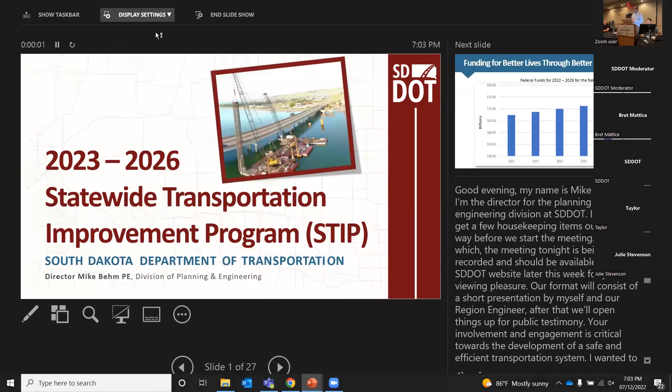Just wanted to talk a little bit about how important transportation is. But really, when you think about transportation and any sort of asset, it requires funding. Our transportation system is really funded through our federal highway program. The federal bill, called the Bipartisan Infrastructure Law, or Infrastructure Investment and Jobs Act, was passed last November. Most of you probably heard about this, a relatively large bill, but for the DOT, on average, about 75% of our construction funds are federal aid. So having a federal bill like the IIJA or BIL isn't really anything new for us. That's how we funded transportation across South Dakota for years and decades.

One good thing about the BIL is we have a 5-year plan or 5-year investment strategy that came through that bill. About $350 billion nationally is going to help improve transportation across our nation. For South Dakota alone, we're going to see around $380 million a year to help improve transportation systems across South Dakota. I mentioned that our federal funds pay for about 75% of the construction projects we have in our state.

The remaining 25% is comprised of fuel tax and excise tax. When you purchase a vehicle, go get it registered. That helps to go back into the coffers to help build and maintain transportation systems in South Dakota. So using those two mechanisms, it helps us to really invest in the future and invest in the transportation system in South Dakota. As we look at that investment strategy, we need to think about what's most important.

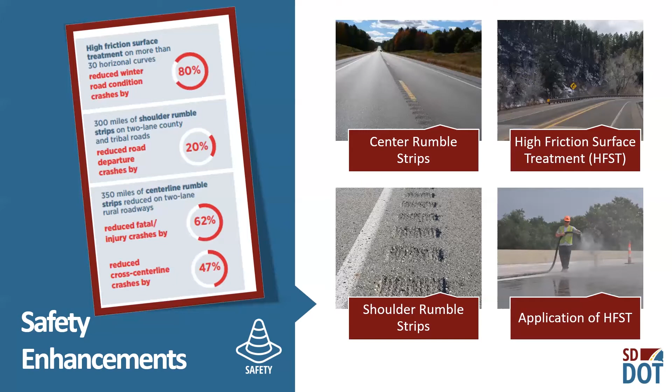Of course, a safe system is great, but it needs to be reliable. I travel a lot throughout South Dakota, like I'm sure many of you do. I spend a lot of time in the car helping to fund the transportation system through that fuel tax.

But as I travel across the state, like many of you, you probably don't measure distance in actual distance, you measure it in time. That's how we measure things at our house. And when we're going somewhere, all right, we need to go to Aberdeen, we need to go to Sioux Falls, Rapid City. How far is it? Oh, it's about 2.5 hours. It's 3 hours, 2 hours and 42 minutes. That's a reliable transportation system.

As we see more traffic throughout our state, especially in our metro areas, we're deploying new innovations like in the upper left-hand corner, which is a diverging diamond interchange. For those of you that have been to 41st Street and I-29 in Sioux Falls, you understand that making that left turn off those ramps can be very difficult at times. This is a new technology that we have. Our first one actually is going into Rapid City LaCrosse Street right now, but it allows that left turn maneuver to happen easier. It's going to help reduce congestion. It's also going to help reduce crashes that are occurring there.

If you don't have the 511 app, that's the one in the middle. I highly suggest you get it. Again, as you think about transportation reliability, it's about expectations and ensuring that you have a good indication how long it's going to take you to get from point A to point B. Our 511 app has been really just a hit. It allows people to plan out their trips, see what the weather conditions are, take a look at the actual video or pictures out there, what the conditions look like at that point in time. It's all intended to provide that reliable transportation system, put the tools in the hands of the users and the customers, again, to ensure that they can get from point A to point B when they need to and plan for that trip.

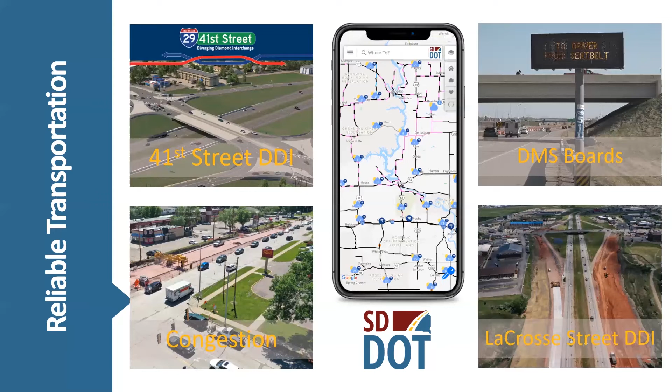Of course, you can have a safe and reliable transportation system, but if you don't have physical assets, it doesn't get you anywhere. So I love this picture. Those are actually all the structures in South Dakota, over 5,700 bridges in South Dakota. And you can actually see the streams and the tributaries that tie into it. It's a really large number of structures that we have in South Dakota, especially considering our population. Population density is low, yet a high number of structures.

We're focusing on different ways to help improve our transportation system, whether it's working with our local governments in the Bridge Improvement Grant Program. There's some great information in the back table there. Also a local federal bridge program, because we understand and we acknowledge that all transportation systems are interconnected. It doesn't do us any good, again, to grow that grain in the back 40 if you can't get it to market. So township roads, the county roads, the state highway system, the interstate are all critically important to ensure that connected transportation system.

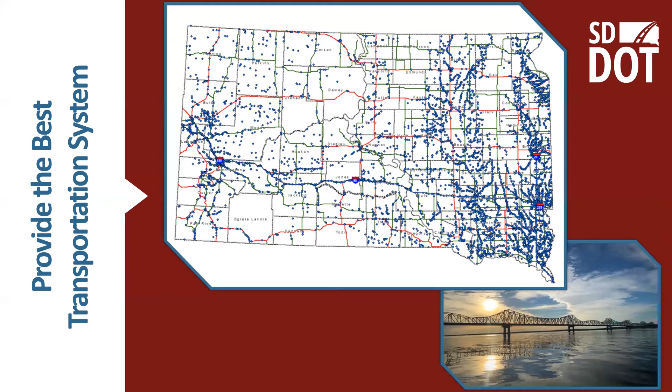So again, working with our local governments, where we have several projects and maybe hit on a few of them here tonight, on our local government's system to help replace some of the structures that are old and in need of repair. Focusing more on the state highway system, this graph just kind of helps give you an indication of what are the ages of our structures.

Through techniques like preservation of our decks and other techniques to preserve the integrity of those structures, we've got some really good life out of our bridges. Generally, you could anticipate 50 to 75 years when those bridges were originally constructed for how long they'd last. It's like any asset. You can do a very good job of maintaining it, but at some point in time being used, it needs to be replaced.

We have a large number of structures in that 40 to 70 year age, which coincides very well with the build of the interstate system, along with the builds of the federal highway bills. So as you can see, we got a lot of work ahead of us, but in the same sense, we're maintaining those state structures in relatively good condition. Over 95% of our bridges are in good to fair condition, which is a great number for us to have.

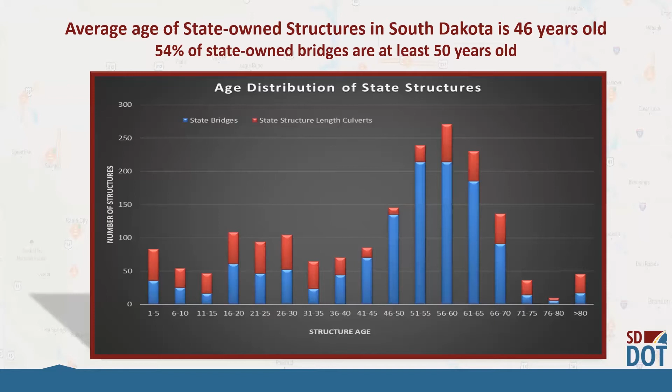We're seeing this wave coming and we're trying to plan for it. So we're going to see a lot of structures coming up in the next few years for replacement across South Dakota. As we look to replace those, we want to make sure they last for generations. So in the upper left-hand corner, you can actually see rock, riprap. Well, we have flood events, and I think 2019 is a pretty darn good example of it. Had a good chance to visit with a friend from Edmunds County here earlier about some flooding issues they have too. So as we look to rebuild structures, now we're shooting for 75 to 100 years on those structures.

So we know that events can and will happen. So what can we do to help prevent that bridge from going out? Instead, maybe the roadway gets washed out. A little section of roadway is a lot cheaper than a bridge. So we're working on things trying to prevent bridges from actually going out and improving the resiliency of our transportation system.

The upper right-hand corner, that's actually one of our drones, our unmanned aerial systems. Those are being used now. Today, they've been deployed for bridge inspections. It makes us really more efficient, provides us better quality data. And at the end of the day, it doesn't put our folks up in harm's way near as often. Been a great opportunity to deploy technology, again, trying to serve our customers, give that best transportation system we possibly can.

Lower right-hand corner, that's actually just steel, right? So as we look at reinforcement that we have in our concrete and actually in our bridge decks, we've made a transition. We're transitioning from epoxy coated, which is just a coated steel, to the stainless steel. And the reason for that, of course, we got 2 seasons. We got construction season, then we have winter, and we see a lot of salts going down. So as the salts go down, what happens with steel? It corrodes, right? We start seeing issues, decks start going.

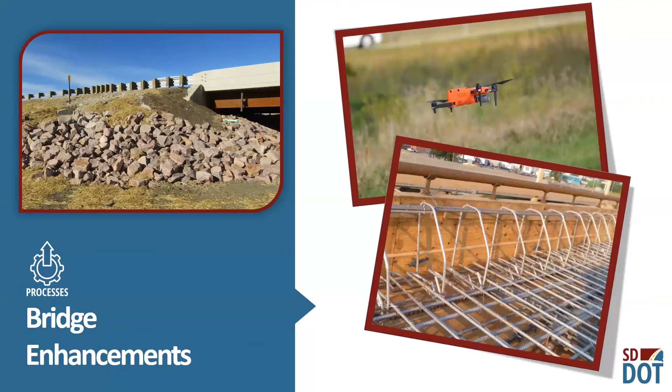So we're deploying a new technology for South Dakota of using stainless steel reinforcement in our bridge decks. We're showing that we should be able to save about 20% life cycle cost in that bridge over time by shifting over. Higher initial cost, but better value at the end of the day.

And I'd be remiss if I didn't talk about pavements a little bit. So obviously all of us drove on a road, not just bridges, contrary to what a bridge engineer would like to think. But our pavements in South Dakota are in a pretty good position as well. The blue on top indicates excellent, green good, yellow fair, and the red is poor. Our target level is to have 80% of our pavements in good to excellent condition. That is actually the highest return on investment we can have.

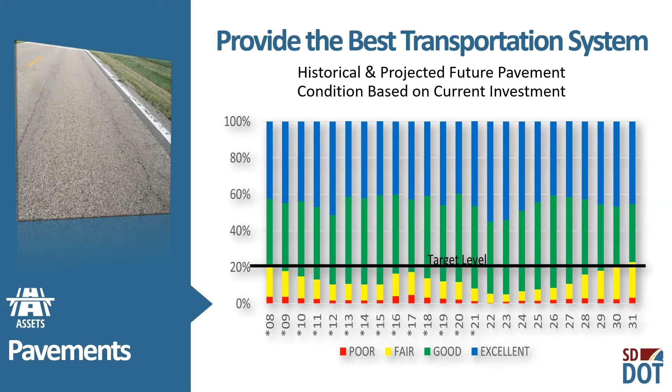And it's good to have some pavements in poor condition because like any asset, some things just need to be rebuilt, totally torn out, replaced. So as we look at our pavements, we anticipate being able to maintain our pavements in that good to excellent 80% target level in the next 6, 8, 10 years, which is a great thing for us to be able to do and be able to maintain that into the future. But that doesn't mean that we aren't looking at innovation and better ways to do things. The upper left-hand corner, that's actually our intelligent compaction.

So what that means, it really helps us with thermal imagery, the roller patterns and things that happen after the placement of the asphalt, trying to get the density back on that pavement. Again, we know that if we can get a better density over time, we can have a better product overall at the end, longer life.

Upper right-hand corner, trying to find a way to tie our pavements together. That's a notch wedge joint. Again, trying to find ways to get better every day. Lower right-hand corner, that's our next generation concrete pavement. One of the innovations we deployed here in Sioux Falls a couple of years ago. Great opportunity for us to look at accelerating construction, also giving that long-term ride and durability from a pavement standpoint. So we're constantly looking at ways to help improve the transportation system across South Dakota.

I'm going to turn it over to Mark here for a little bit. He'll talk about some projects coming up in and around the region, and I'll come back towards the end. So Mark.

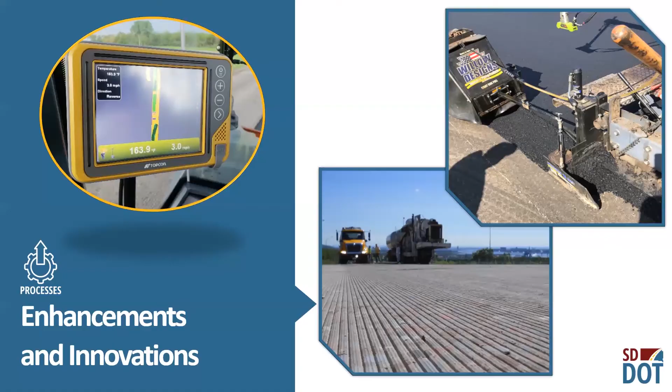Thanks, Mike. I am Mark Peterson, Aberdeen Region Engineer, and I have Matt Bry, Watertown Area Engineer, Bruce Schroeder, who's the Aberdeen Area Engineer, and Brad Letcher, who's the Huron Area Engineer here tonight. Those are three of my team that handle things in the area office and handle the construction. I'm going to be doing a very high level overview of the construction projects we have coming up for the next 4 years. If you have questions on individual projects, I would save them till the end. We'll have plenty of time for Q&A, and plenty of people willing to answer your questions.

So I'm going to start off in 2023 for the Aberdeen region. We're going to have 9 resurfacing and surfacing projects across the region. We'll be resurfacing 106 miles of roadway, and it'll cost about $50 million. As you can see, they're kind of scattered throughout the region.

For the grading program, we have 3 different projects. Highway 15 south of Milbank, we'll be finishing that up, then Highway 25 north of De Smet, and then we'll be working on Highway 14 down by Arlington. It's about 19 miles of roadway. It'll cost about $33 million. And when we do reconstruction, we're going to widen that road grade out, add shoulders to the roadway, replace the pipes if need be, any of the structures, and totally regrade that section and start over.

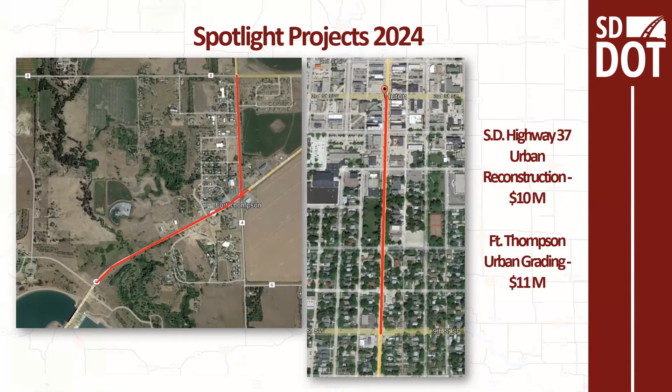In 2025, we have 10 surfacing projects in the region. We're going to cover 140 miles of roadway, and it'll amount to about $72 million worth of work. And then on the grading, we have four new projects in 2025, where we're going to reconstruct 28 miles of roadway for about $50 million.

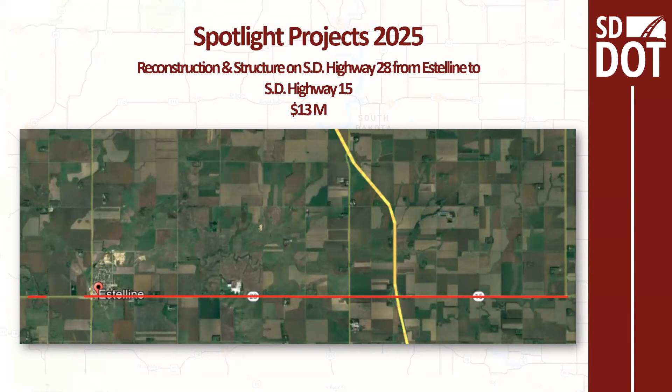One of our biggest jobs that year is going to be the Highway 28 reconstruction from Estelline over to South Dakota Highway 15. And we're also going to replace the bridge over the Big Sioux River just west of Estelline. And that'll be about $13 million worth of work there.

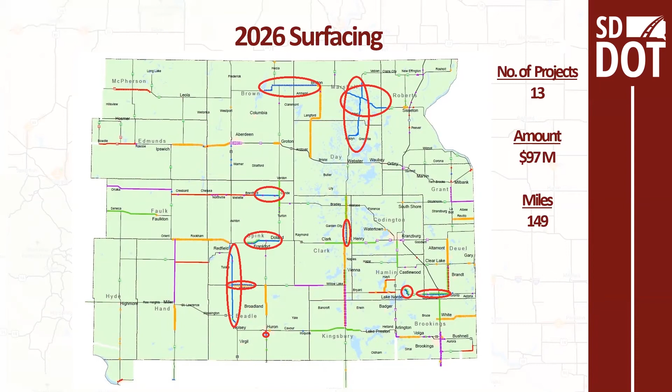And in 2026, another big year for resurfacing. We have 13 different projects that'll cover 149 miles in the region and about $97 million worth of work. And on the grading and reconstruction side, we have 5 different projects throughout the region. They'll cover about 21 miles, and it's about $50 million worth of work.

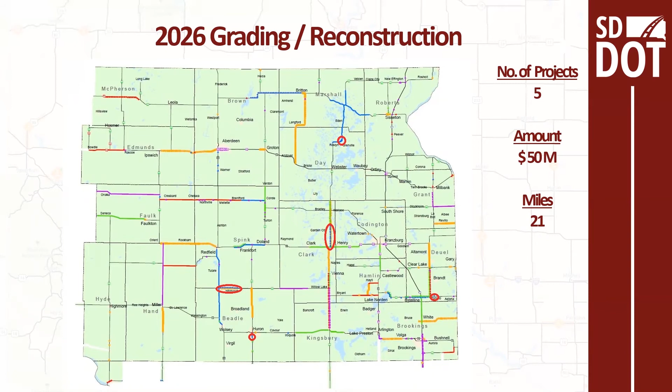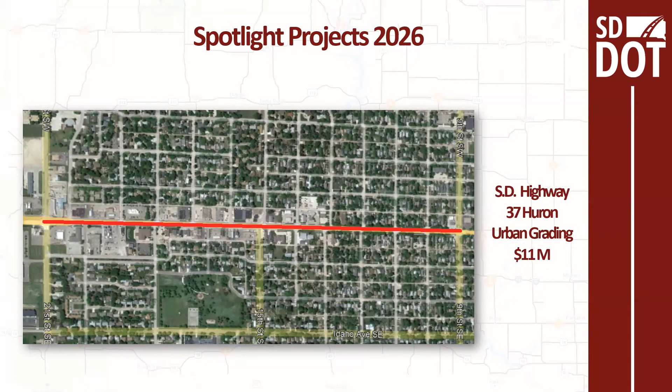And probably the biggest job we'll have that year is the second half of the Huron reconstruction on Highway 37. And that's a full urban grading job. We'll replace the storm sewer and the pavements and the sidewalks and upgrade any signal systems and lighting. That's about $11 million.

Also, over the years 2023 through 2026, we have a lot of bridge work coming, especially with our local partners. Right now, it's looking like we're going to have 11 state structures that we're going to be totally replacing over those years for a little over $50 million. We're doing 36 structure rehab projects to try to extend the longevity of those bridges for about $14 million.

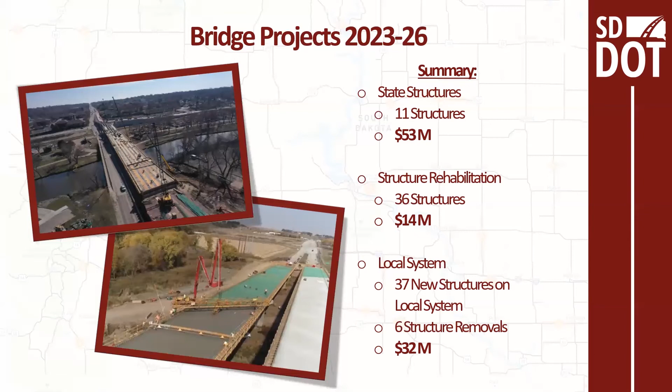And then on our local systems, we have scheduled 37 new structures for our county partners and 6 structure removals. And that'll tally up to about $32 million. And that number will probably rise with the big grant. Oftentimes we don't see those projects coming for more than 2 years. So when we get into 2025 and 2026, the numbers will probably increase for our local partners.

So in total, we're looking at almost 300 miles of new pavements, 120 miles of roadways being reconstructed, 48 structures being replaced, 36 structures being rehabilitated. And then with our maintenance type projects where we're doing chip seals and route seals and replacing striping, we're going to actually touch almost 62.5% of the roadways and improve them in the region. And our total cost is looking at about $580 million. So with that, I will hand it back to Mike and open it up for questions.

Thank you, Mark. $500 million. So a lot of projects coming up. So we are to that point of the night where we want to get input from folks and hear from you and your thoughts and your concerns or opportunities for improvement that we have from the department. And getting the comments is important. They're provided to our Transportation Commission, but most importantly, the transportation system isn't DOT's transportation system, it's public. So we want to hear from you, hear what opportunities we have for improvements across our region or just across the state if you have other ideas as well.

We are going to have a microphone up here. The reason for that is that we are recording this again, and we can also know who made the comment. So when you raise your hand for a comment, Steve will bring the microphone over to you. If you would please just introduce yourself, and if you're representing somebody or an agency, just who you represent, and we'll go from there. So who'd like to go first tonight? We did bring up a stack of highway maps, so the first one gets a highway map. Julie? Okay. Steve?